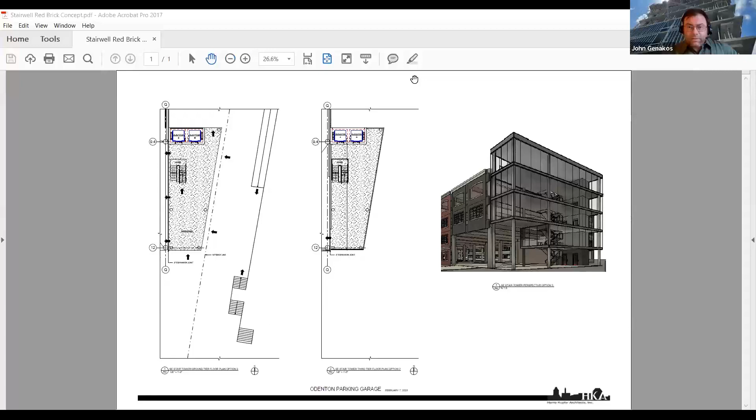For context, the platform is right in this area here, with the station south of here. This is one of the main off-ramps from the platform and stairways. This is the southeast corner of the garage. I'm not sure if you can see this, so I'll blow it up a bit more to make it easier for everyone.

This is really the main circulating corridor where most passengers will be exiting off the ramp and stairs and entering into the garage. Hopefully you can see my cursor moving around, can everyone see that? The idea is to make the entranceway as open and accessible as possible, including the bottom section, so folks exiting the ramp or stairwells can go right into the garage, circulate up the stairs to the second, third, and fourth levels, or go right into the elevators.

The other concern was making sure this area was open enough in case of an emergency evacuation at the platform, so everyone from the train could exit and, say on a rainy day, get into the garage in pretty short order. Informing that corner was really important, especially to the state and county partners from a safety and circulation perspective.

You can see we've grabbed a representative concept here of how the brick would look from that perspective on this side. That's part of the schematic approach we've run into and walked through.

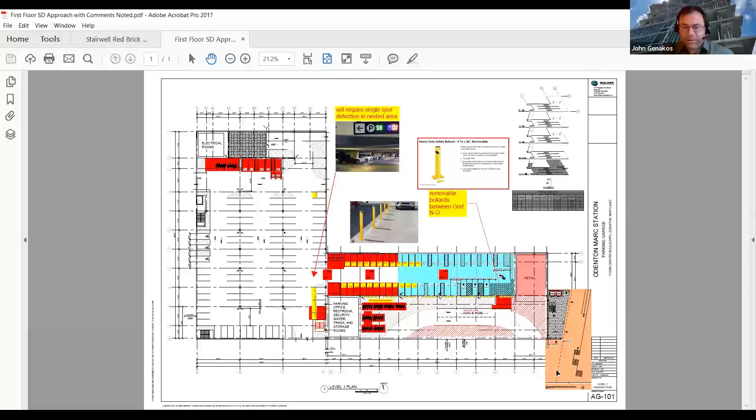Now you'll notice, and I'll focus in on this, that we've made a couple changes. I'm going to start in the southeast corner and work my way fairly quickly through some of the major tweaks or comments we've incorporated here. You'll see we still have retail included in our concept and approach. Some changes we've made from a circulation perspective are mostly driven by safety and convenience concerns.

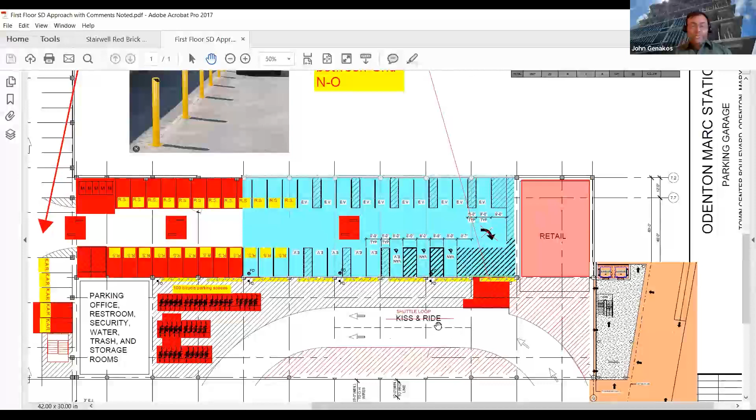Before, we did show traffic flowing through this first floor into the kiss and ride area - we've now eliminated that kiss and ride spot and turned this into a shuttle loop. This enables us to park at least 2 buses in this area with queuing available. The reason is discussions on the county side about future-proofing the garage in case more resilient and robust bus service ends up happening at the garage, so we have the infrastructure in place, as well as enabling space sufficient for a bus to queue and one to drive past it.

From that perspective, we close off this circulation area, which was open before, with some removable bollards, so that in an emergency case or other operational needs we can open this up - you see the bollards marked here. We added some additional bollards across the face of this parking area just to protect pedestrians from this flow. So again, if you're coming off the platform, you can come down the ramp, off the stairs, no walls through here.

You can walk unencumbered into the garage on the first floor here and continue walking through. We have a pretty substantial number of bicycle parking spots here, and you'll see another cluster of these in the northwest corner of the garage too. We felt this will also enable, with the connector trail coming in from over here, for bike passengers to bike into this covered space, park their bicycles, and then be able to go to the train.

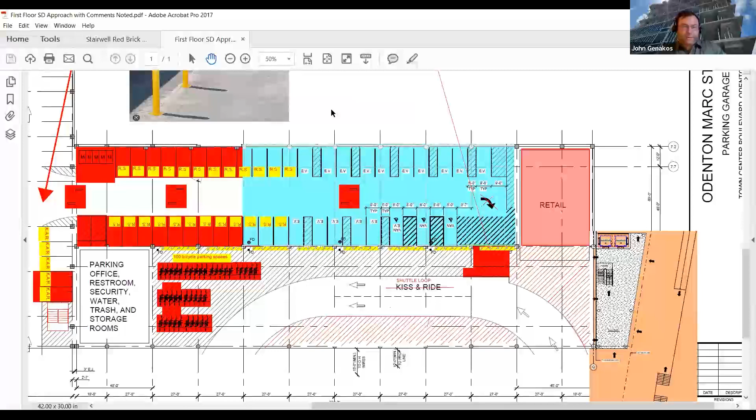I'm going to back out of this for a moment to give a larger context. You see we have our ADA compliant van parking spots here, and an electric vehicle cluster in this area as well. The idea is we would augment this, now that we've turned this into what we'll call a dead end, a spot where you can come to the end, make a K-turn, and drive back out. We want to make sure customers are aware of that, so we've suggested having a cluster of signs before you drive down this way to indicate where the EV parking is, where the ADA parking is, and the number of available parking spots.

Other notable first floor suggestions we've backfilled in: here again in the northwest corner, this is the line of the garage. We've added another cluster of bicycles here, and then another smaller cluster of EV parking close to the electrical demarc rooms.

Those are really the major tweaks to the schematic approach. Again, trying to ensure we have good circulation into the garage, good clusters of our EV and other amenity related spaces, and more so the major concern being ensuring a good, clean, unencumbered and safe access into the garage.

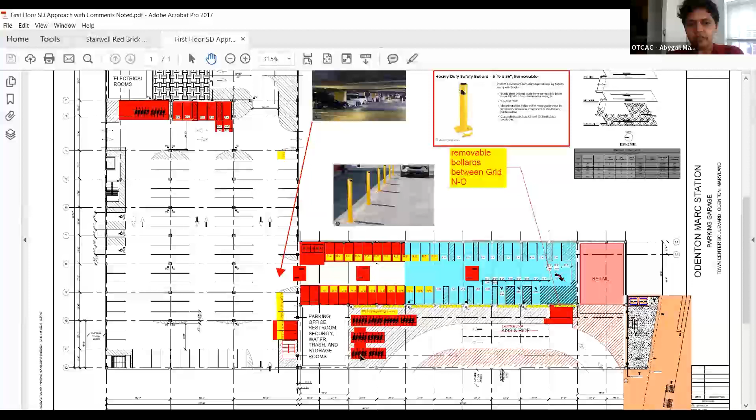And I know we brought this up previously, clarifying the bicycles and the sidewalk length, will they be separated somehow, or will bicyclists and pedestrians just have to share the typical sidewalk length?

If there aren't any other questions on the first floor schematic approach, that's actually a great segue into a work in progress we have for the Town Center Boulevard cross section that I could jump to. Okay.

Any other questions on this? What does RS stand for? By the EV spaces, it says RS in the red areas.

Is it these ones here? Oh, reserved space. Okay. So there's a small pocket of reserved spaces here that's adjacent to the parking office. It's a small cluster there.

Okay, and KAR? Kiss and ride? Yeah, those are the kiss and ride spots there. Okay, just making sure we understand the nomenclature.

Thank you, no problem. Sorry, that writing is so small that I can barely see it with my glasses. It must be time for an upgrade.

If there are any other questions, I'll go ahead and jump to the Town Center Boulevard cross section. I know this was of interest. Now, I do want to say that this is still a work in progress, so we are doing this in consultation with our traffic study engineers as well. My understanding is this is being informed by the current master plan overlays that we have for the area.

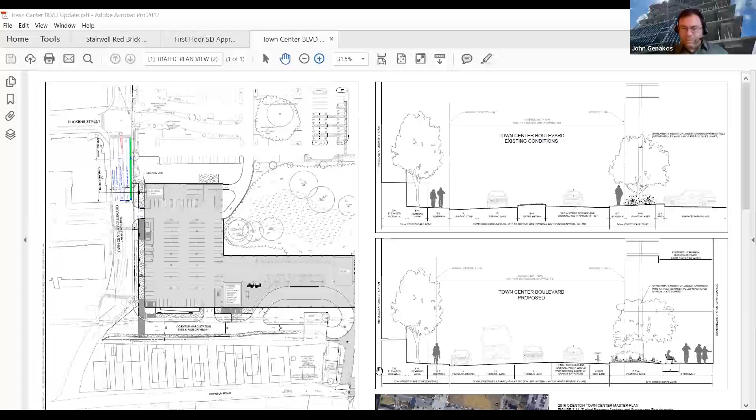This is probably really small, so I'm going to focus in a little bit so we can see it better. Bear with me for one second. I'm going to scroll up a little bit so we can see. Hopefully this will behave itself and we'll be able to see a little bit.

Just bear in mind the top image is kind of what the existing conditions are, and I should be able to at least give you an idea of what some of the proposed approaches are.

You see here that we are eliminating it. So we'll start from, I guess, my plan left over. You're going to see that there's similarities for our first few zones on the far left hand side, and then we started making some tweaks or changes as we get across Town Center Boulevard closer to the garage side. This is the side where the garage would be located, just to orient everyone.

So we're proposing removing the grass median in this space and creating a turning lane so that we'd be able to turn into the garage from there. We have another smaller lane that we are then using some of that space to create a bike lane. We'll have a planting area, seating area, and then a sidewalk area, then the garage from that perspective.

This is the approach that we are currently studying at this point in time. My understanding is the bike lane and planting areas keep the bike path and pedestrians separated from one another with this kind of planted space or buffer area. Now, obviously, we're not showing any protection or other versions of maintaining protection for the bikes in this image, but there is obviously an opportunity for fencing, signage, and other improvements to ensure there is at least a visual demarcation along with the marking of the road for the bike pathway.

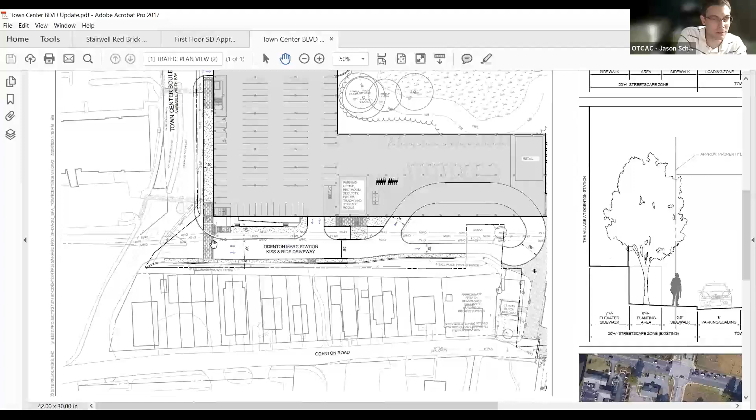And Jason, you're referring to it connecting, I'm recalling, on the other side. So if you go to the other side, north of your parking deck. Okay, the side of Annapolis Road. Oh yeah, across the road, across 175. I don't even think this was looked at.

Okay, yeah, I see what you're doing here. You're basically taking that sidewalk and right-angling it into the existing sidewalk so it'll carry upwards.

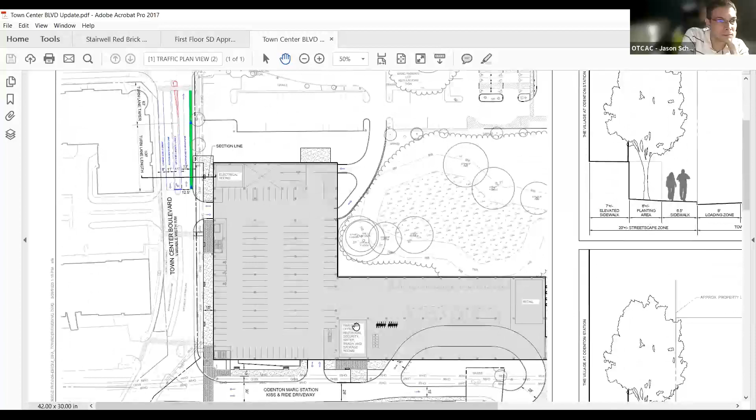Mm-hmm. Okay, yes. And so this would be setting the context, imagine if you will, that from here north is the domain of the TOD developer. Yep. And so this cross section will basically set the precedent for them to carry forward with the rest of their streetscape.

Now I guess the question is, why aren't we doing that? And the answer to that is, by doing so, we want to allow flexibility for that developer as far as where they might want to have additional curb cuts.

They might want to move this entranceway, they might want to move it further north, and they'll probably need to tie into utilities and other areas here. So it kind of doesn't make sense to make one long, beautiful continuous streetscape to 175 that we know is going to get destroyed as part of the developer's initiatives and efforts from there.

So where does your scope of work stop? Hello, Gordon. Sorry, Stuart, we have not had a chance to delineate that quite yet.

Yeah, because I think that's somewhat of a concern. And I understand not wanting to do something that might get destroyed. Totally agree with that. But I think at some point I'd really like to know where that goes. I mean, if your traffic line and lane changes are where they're indicated, at least it should go to the corner.

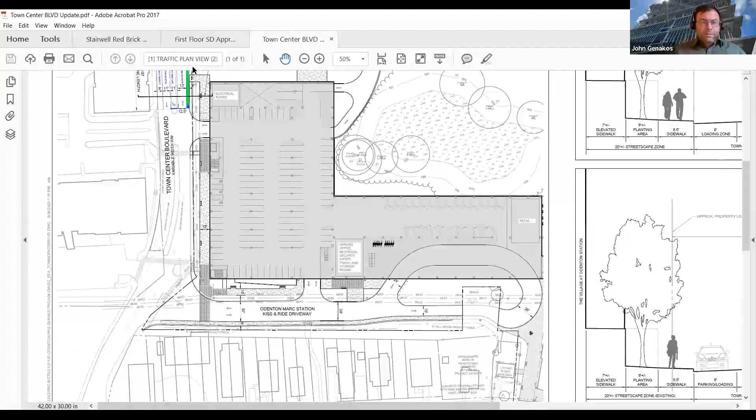Anyway, I guess one of the factors here, and it's kind of outlined a little bit in the hashed line, is there are BG&E, or electrical poles, that run the entirety of the Town Center Boulevard area, I mean, high wire poles or medium voltage distribution that runs down the street here. And I think part of the issue we're running into is we also need to maintain a 15-foot right of way on either side of that pole.

That's a very good reason. And look, to my credit, shame on me, but that's the difference between two-dimensional, showing this on a plan, and three-dimensional, knowing and being on the site, and how you really can't modify it because of the site condition. You really can't, in trying to achieve and accomplish the same thing. So got it, understand, remember that.

Yeah, we looked at what the cost would be to try to move those underground or move them altogether, and it's pretty prohibitive. Got it, got it, I did it across the street. You don't have to tell me. Understood.

This is kind of a marquee development in a very high profile area. Wouldn't that be a good reason to spend the money to bury those wires?

They're buried already, I think it's just moving them. Yeah, they're underground. They're not high voltage lines above. They're the streetlights, aren't they? No, they're poled electrical, so they're above ground on poles.

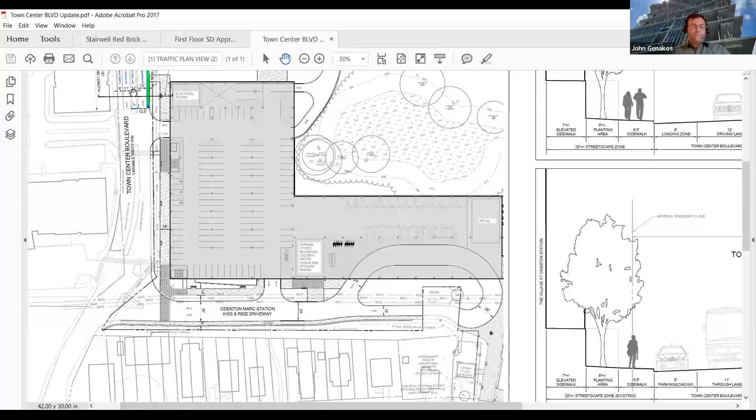Right now we're showing a bicycle lane along Town Center Boulevard. What if we were to direct bicycle traffic out to the pedestrian bike lane or bike pathway up this way? So it would travel up under the bridge, under 175, and out of the site that way. Then if you're coming into the site, you could come into the station area here and travel into the neighborhood rather than mingling it with Town Center Boulevard.

I think anybody's going to go wherever they want no matter what we do, or no matter what you do, or if you put a bike lane there or not. The bike police aren't there. If they want to ride on the sidewalk and that's convenient, I think that's what's going to happen. And in reality, I just... but I do think it is.

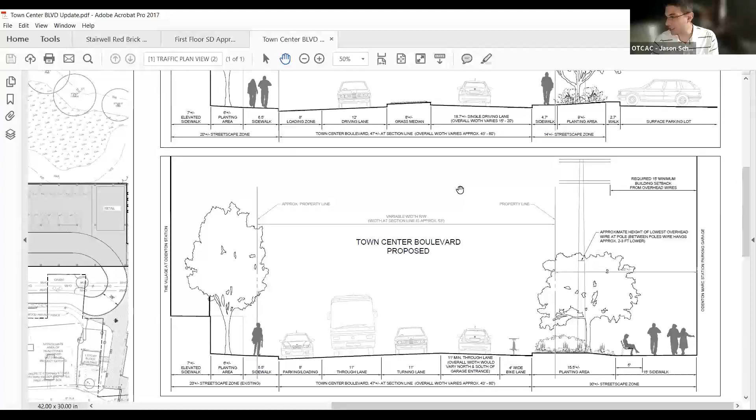I had a few other items just to touch on really quickly, but I don't necessarily have to.

We have kind of an informed temporary parking approach that we've collected, which the public partners have agreed upon, as far as how we're going to approach parking while the garage is being built, where to locate ADA parking spaces and other accessibility spaces, which will connect via a ramp to the pedestrian bike pathway that gets folks to the south platform and access to the platform itself.

So we've informed that space. I'm not sure if you want me to touch on that now, or I can touch on it later when I show the overall site approach. I just know we are making that connection and making improvements to the parking spaces north of the wetland buffer area, north of where the garage would go, with the intent that being the space where ADA and kiss and ride could go. So you could still have drop off, and a clear and compliant pathway to the platform to service customers while we are interrupting that flow through construction.

Okay, would it be possible for you to come back next month with a specific focus on those two items?

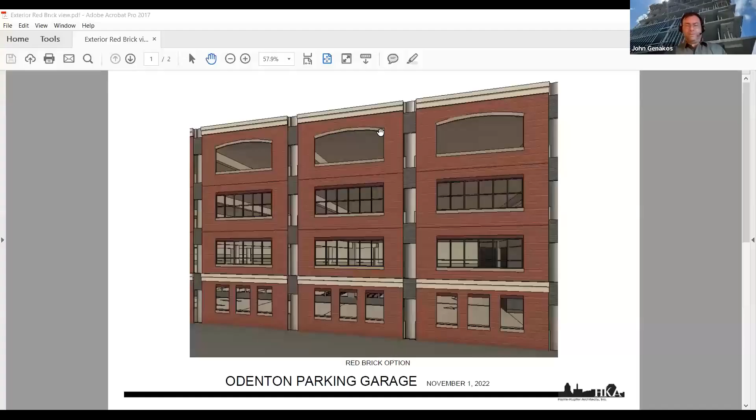And I do have some examples of that. For those of you who were here last time I presented, I can show it really quickly - I wouldn't call it a high resolution model or rendering, which we do have, but let me share it. I believe last time there was some discussion about it, but this is just a panel cross section here, and this is the southwest corner, as if you were across Town Center Boulevard looking northeast.

Yeah, I think we had presented a number of options - I think maybe it was Abigail, I'm not sure who. But there were a bunch of other considerations, because this looks like a warehouse, a canning district in San Francisco or something. I don't know that this would fit the vision for Odenton. I don't know why this was picked. Why was this selected? What does this do? It's just red brick - it's a parking garage, end of story. But it doesn't matter if it's a parking garage, it's a building, a huge one.

I mean, I think what we talked about - I recall the red brick, I recall the tan brick or gray brick to distinguish the openings for the entrances to the garages. That's sort of what I remember. This corner here is just a stairwell. The opening that you spoke of, or showed from the other perspective, is in the corner here - that would be in the southeast corner.

And Martin, I don't 100% disagree with you, I don't. But I think we'll have that time now, later on. This is so far from our last time coming back, with input and community meetings and all that.

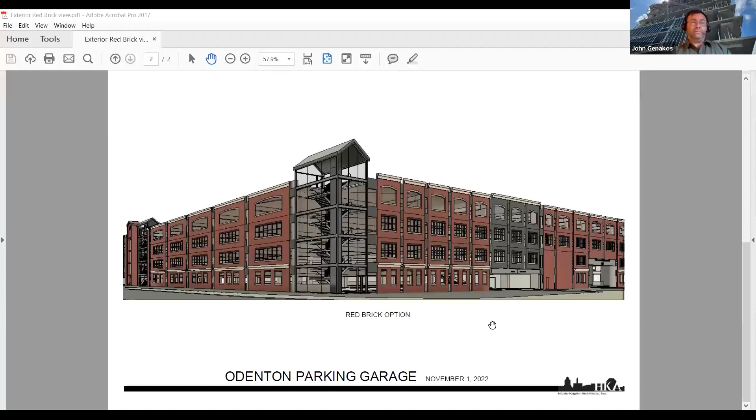Okay, thanks, John. So I want to give each committee member a time to make a final comment. Andrew, any final comments for John?

I just wanted to say that I like the glass corner on the southeast corner of the building. I think it has the potential to create something interesting and dynamic from the train station side. That glass canvas could be a good opportunity to create an interesting visual graphic design on the glass, through fritted glass or some other kind of glazing coverage, or even using vertical fins to add some color and depth to that facade. That would be interesting to look at while riding by.

Thanks, Andrew. I was curious, what phase of design is this project in right now? Design development. Yeah, this is the time to be changing the look of the building. Just tacking on to Martin's comment. Thanks, Andrew. All right, Colette.

I really appreciate the green space, how that's been done so far, just on that one rendering, and the pedestrian sidewalk and the bike path. I really appreciate that those things are being brought in. I'm excited to see how this continues to progress.

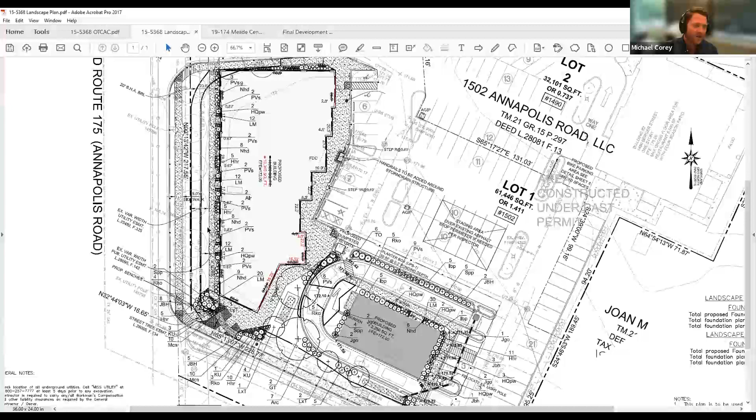The buffers on the site are being held and are following approved modification number 13.314, which reduced some of the buffers around the site because of site constraints, mostly utility easements along Annapolis Road and some overhead power lines along Berger.

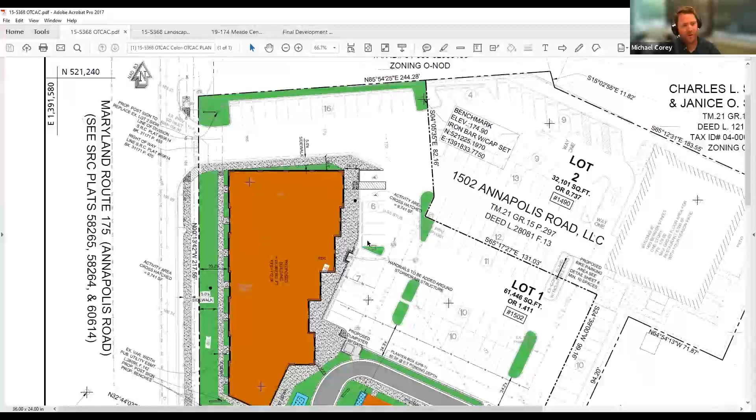For the activity space and green areas on the site, let's go back to the color exhibit because it shows it a lot better. Activity spaces would be considered the sidewalks along the parking areas, which are expanded for more pedestrian flow, and the larger entryway plaza area in this corner of Berger and Annapolis Road with benches and a more architectural staircase leading up. The green areas, as you can see, are along the frontage, perimeter, and interior landscape islands for landscaping.

Setbacks for the larger retail building are 35 feet off Annapolis Road, driven by a 12-inch water line with an easement along the frontage, so we are probably 3 or 4 feet beyond that.

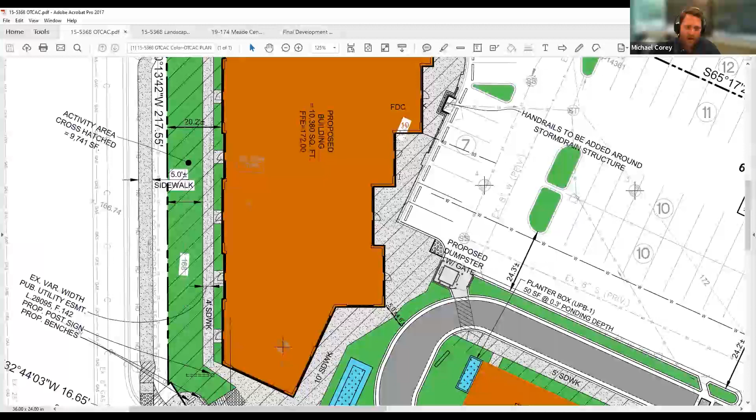Bicycle and pedestrian amenities. I mentioned the benches before—we've talked about adding a couple more benches along the doorways, outside the retail areas, and adding proposed bike parking in the interior of the site that would provide bicycle parking for both lot 1 and existing lot 2.

And then signage and lighting. Signage would be along the frontage on Annapolis Road. They would have to be either wall signs or pole-mounted hanging signs because of the utility easement, and we didn't want to disturb that or risk the signs having to be removed in case of a utility replacement.

Site lighting is mostly existing along Maryland 175 and Berger. There are cobra lights, and the interior lighting are traditional style lights. As you can see, these are the different fixtures, and this is the site as of a few years ago—it's pretty similar today.

So, Michael, while you're moving on to the next one—is the footprint size the same in this revision that you had? No, it is a reduced footprint. So the previous layout, as you can see, is this.

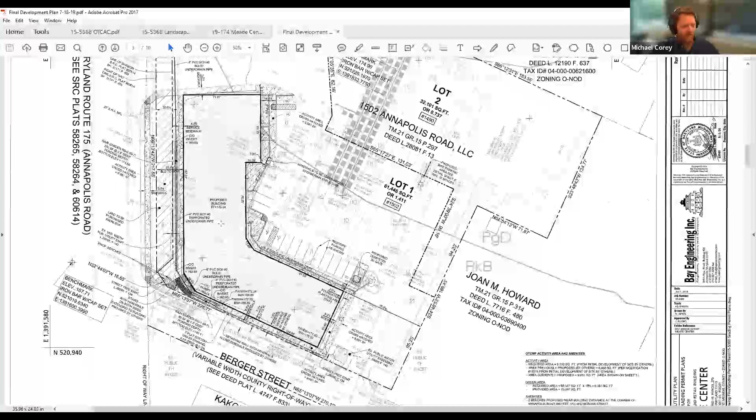Okay, so it's this entire building, and with the new layout, you can see there's a lot more green space in between, and a little bit more up front.

Michael, this is Martin again—another question about the drive-up portion for this restaurant. Did you select it just out of curiosity because there's no room for parking, or is it the kind of restaurant you're expecting to put there?

Jim might have a better explanation, but we've removed the office portion of this project because it was previously approved prior to COVID, and since then that need has really been removed, as we all kind of know. So based on that, it could have just been all the same style of retail, or adding this restaurant drive-through gives the site a little bit more flexibility. Jim, I don't know if you want to expand on that further.

Yeah, hi everyone, this is Jim O'Hare, I'm the developer. Just so everyone is familiar with the site, we've actually built the entire parking lot, and this is where the All American Steakhouse is located. They're a tenant of ours and have been open for maybe 6 or 7 years now. But the change away from office was really, as Michael pointed out, demand initiated, and that eased our parking burden.

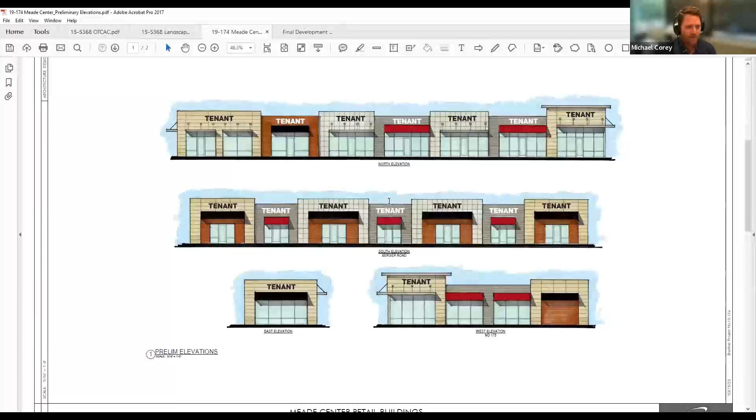Multicolored, to spell out the different tenants easily. And the drive-through, the same color. I believe these are pretty close to the steakhouse colors.

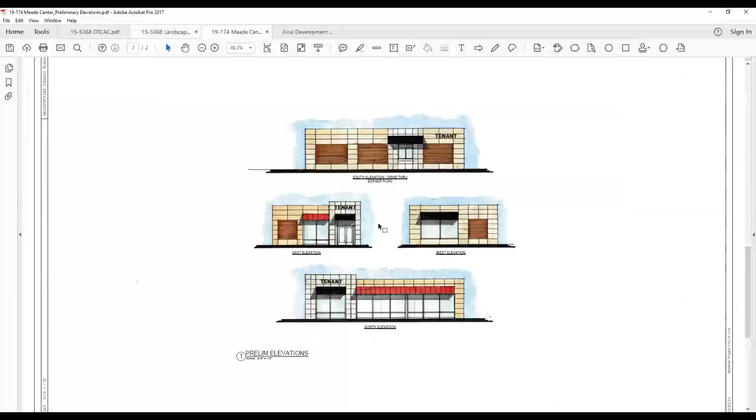I'll bring up the landscape plan one more time. Where's the steakhouse, Michael, again? So the steakhouse is back in this back corner.

So the steakhouse would be covered partially by the new retail on this front pad. Well, the steakhouse is not especially visible though currently from the street, so they are anxious to have the rest of the development built.

So Jim, I'm not familiar very much with this area. What is there now? Is it just a vacant lot with trees? No, if you look at the site plan, on lot 2 on the far right, that building is constructed. It's a 6,000 square foot All-American Steakhouse, a local Baltimore-based chain. They have maybe 8 or 9 restaurants around Baltimore and DC, and they've been open and operating for 6 years.

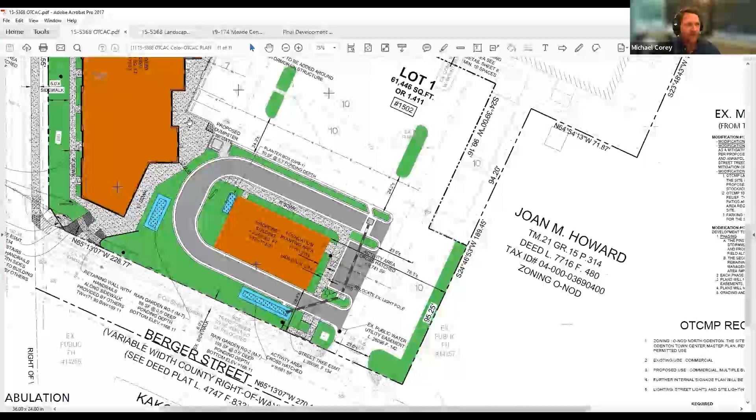There is proposed sidewalk along Annapolis Road, and then there's going to be an ADA ramp in this back area to flow through the site and give another access option to the front of retail.

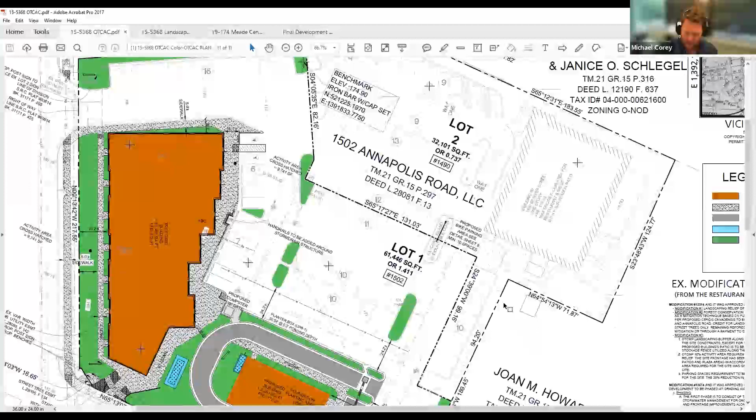And the final things. At this time, we're not proposing any bonus program requests. Other than a modification to combine preliminary and site development plan through Anne Arundel County, we are not proposing any additional modifications other than the ones that have already been requested and approved for this site.

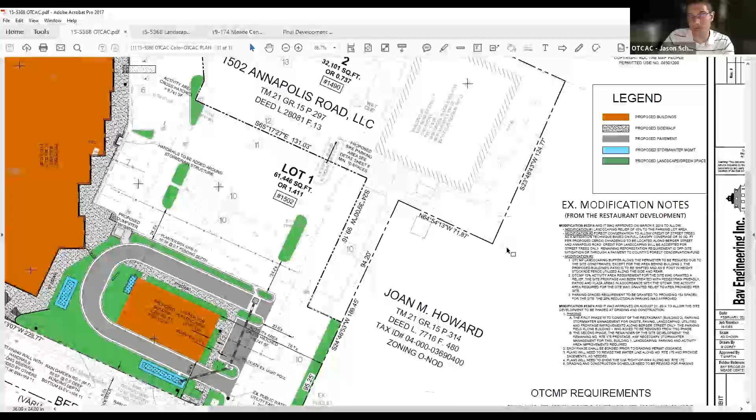Okay, so just to clarify for the committee, there were a number of modifications you previously sought with the previous design. You received approval for those, and those modifications still apply to your current proposal. You are not coming back to revisit any of those modifications or request any new modifications with this revisit to the committee. Did I hear that correctly? Yes. Okay, I just wanted to make sure that was clear for the committee. Thank you.

And with that, I think we've covered all of the bases. So if you have any questions for Jim or I. Okay, so as always with the OTCAC process, the committee will get a chance to ask questions first, and then we'll bounce over to the public, where members of the public can ask questions as well. So I will start off to see if any committee members have questions.

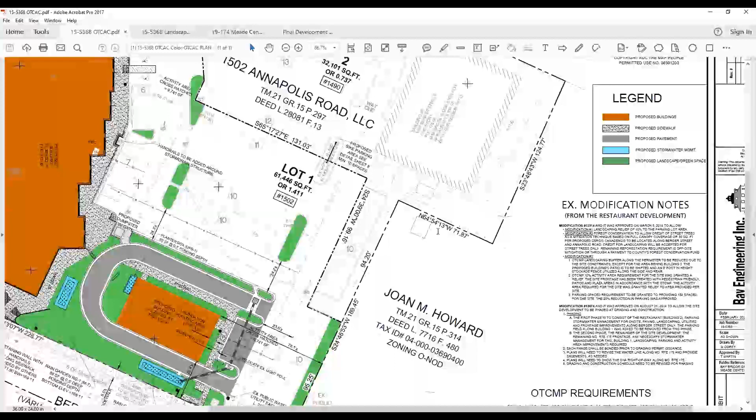Not as much a question as a minor comment. I've seen this before in other places, that drive-through going around the building the way it is can make it challenging for pedestrians coming from lot 1 into the building, where you have to cross over the drive-through or walk around to the front. People in the drive-through are probably paying more attention to where they are in the queue and less attention to pedestrians. So it's a little tricky, but I don't think there's much to be done for it. I think that's a good comment. We will work on a plan to make sure there's a safe crosswalk from the parking lot to the front entrance.

This is Stuart. Don, I agree with your comment there. The one thing that helps though is even though it's separating the 2 lots, it's really one parking field, so people are going to be going out the other entrance and heading west more than likely. I think it'll be okay, but it is something that needs to be addressed, at least for signage. Only other thing I can mention, if that's the way it is, that's great, no problem - the 5-foot sidewalk in front of the building.

So there is a sidewalk between the retail that would be accessible, but I could see people just walking across the grass right to your little sidewalk there into the individual spaces. That's just human nature. It's only a 5-foot sidewalk where we have much larger sidewalks elsewhere. I know this isn't in the town center, it's outside the core, and 5-foot is the standard, I understand that, but understanding that's probably what's going to happen, you're going to develop grass traffic patterns. Maybe address the opportunity for people to cut from that main sidewalk directly to the storefronts rather than going all the way to the corner and back in.

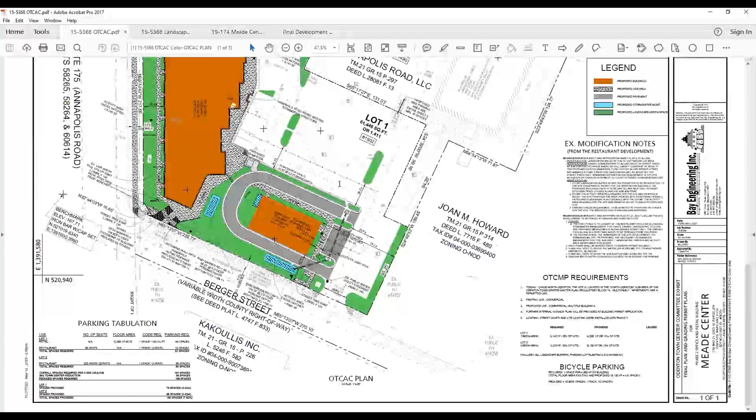With regard to energy efficiency and use of energy, have you considered solar somewhere on these buildings? Yes, I put solar on many of my projects whenever I can make it work economically. The issue that arises is if you have ownership of a strip center like this with tenants, and you put solar panels on, it's hard to link those solar panels into the tenants' meter, and they don't want to pay for it.

What about the restaurant? That's a possibility depending on who that is. One thing I've done is a smaller amount of solar tied to the common area meter. But even then, we have super high efficient LED lights, so we just don't use that much electricity. But we will put in solar wherever we can.

The other thing we've done is when we built the parking lot, we installed a Bay Saver stormwater management system that we clean out regularly. It just got its 5-year certification, so it filters all the water as it runs off the parking lot.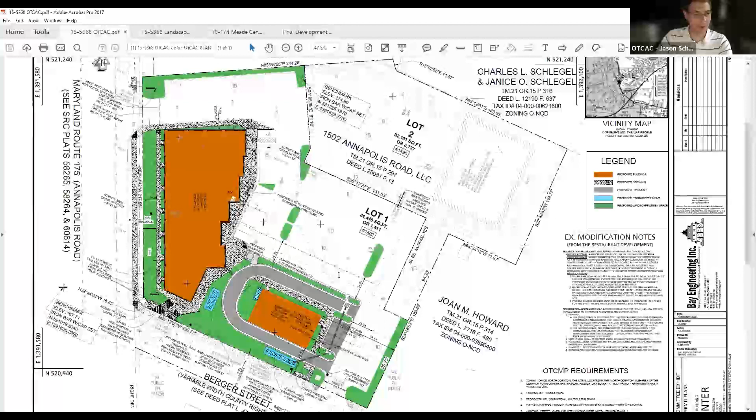Number one, can you indicate what direction the drive-through is proposed to be? Is it clockwise or counterclockwise? It is counterclockwise, yes.

And the entrance from Berger Street is still proposed to be two-way, correct? Yes.

Do you believe you're going to have any queuing issue with your drive-through loop being full, and because you're so close to the entrance with Berger Street, people end up blocking the entrance so they can't get into the Lot 1 parking lot because of queuing?

So we've done preliminary analysis looking at vehicle turning in and out of the drive-through, and queuing within the site and what would happen if queuing came out onto Berger Street. We can get almost 12 cars from pickup to approaching out into the parking lot. It would take 24 cars to go from the pickup window out to Berger Street to become an issue where it would back up into Annapolis Road, and that's just if they come from the Berger Street entrance only.

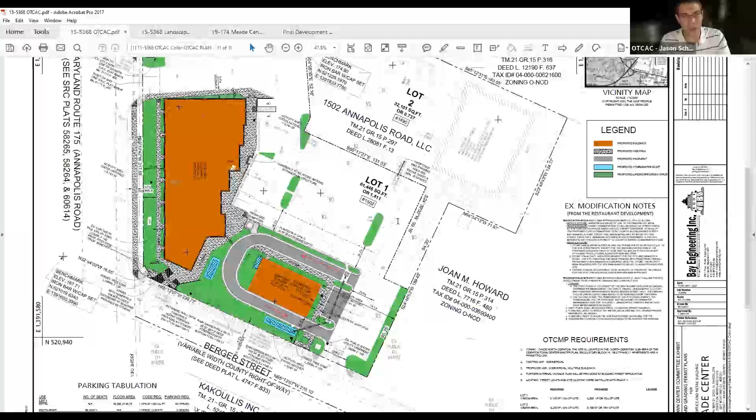Number two, I'm a little iffy on where you said your ADA access is going to be. If someone is in a motorized wheelchair riding in from Annapolis Road, would they have to go all the way to the corner of that intersection with Berger to ride in and get to your retail, or go to the other end of the retail and come back around? It's a little unclear how you're planning for ADA access. I love the idea of that staircase, but I don't want you to disadvantage ADA residents and force them to travel longer to reach your retail space if possible.

So, I fully acknowledge that this is also an edge case, but it's worth considering. This front plaza area is a carryover from the previous design. We can look at adding a switchback ramp here. I just know there is quite a slope from Annapolis Road up to the existing pad.

And because the parking lot's existing, we can't really play with those pad elevations too much. But we can look at adding an additional ramp, or I guess we don't really want to remove that ramp down there, because then we're kind of moving the access from one spot to another instead of making it more accessible. But we'll definitely look at that and see if it's a possibility.

Can I suggest, I don't know that a ramp down there would be worth giving up the green space, given that we are on 175. If there was somebody, even pedestrians or someone on a wheelchair, I just don't know where they would be coming from. So I think our focus should remain on people arriving by vehicular traffic and then having access into the retail, into the restaurant.

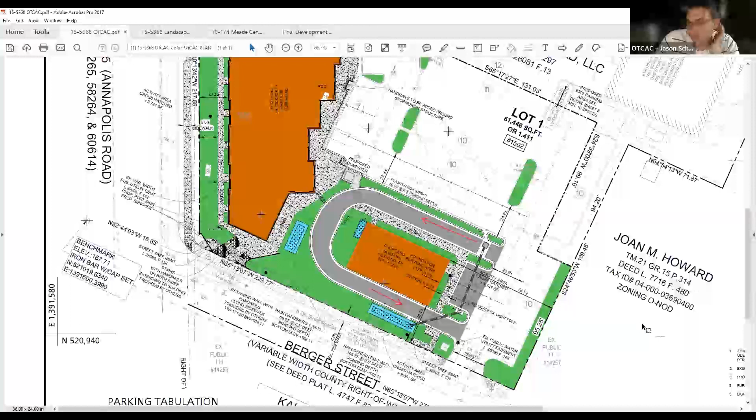Absolutely, absolutely fair. And the one other thing I would also say is the one place where people possibly could come pedestrian traffic would be up Berger Street. There is some residential up that way.

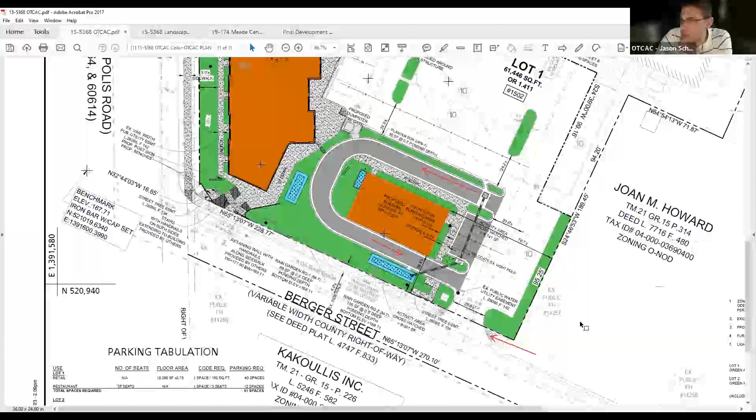That is true. Yes, there are residences back on Berger, but it looks like you have stairs. I'm looking on the north side, and it looks like you have stairs to access your retail on the north side as well. Is that correct?

I believe the stairs are only right here. Yeah, that would be more like a service type door there. We don't expect that. We expect that the store frontage would be facing inward.

Okay, all right. So yeah, that's fine then, because if that was going to be an actual entrance to the store, and the other side was not, okay, I'm good there then.

And then the last question I had was in terms of, and this may be a moot point because the parking lot is already developed, is there the ability in the future to add EV charging stations in your lot design, or has that time already passed since the lot is already there and you're not planning on modifying it?

No, we absolutely plan to add EV chargers. That is the future, and we've identified locations. Michael, do you want to show back towards the steakhouse where those locations would be? Yeah, because the steakhouse would probably be the one where cars would sit for an extended period of time to actually use the chargers.

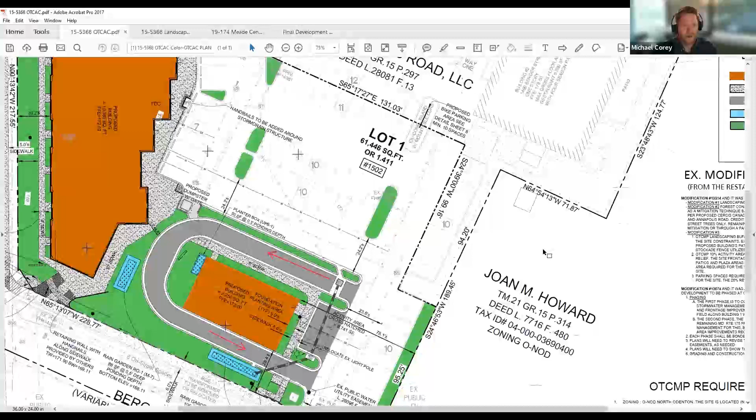So there's a possibility to put them along this kind of edge. There's existing electrical transformers, so there's space to put a bit more of the necessary infrastructure for the chargers there. There's also some space along this rear. So we've identified some spots we need to address when we're in the site design, when we're talking to charging infrastructure people, to figure out where they can get their feed from and what also makes sense in their eyes.

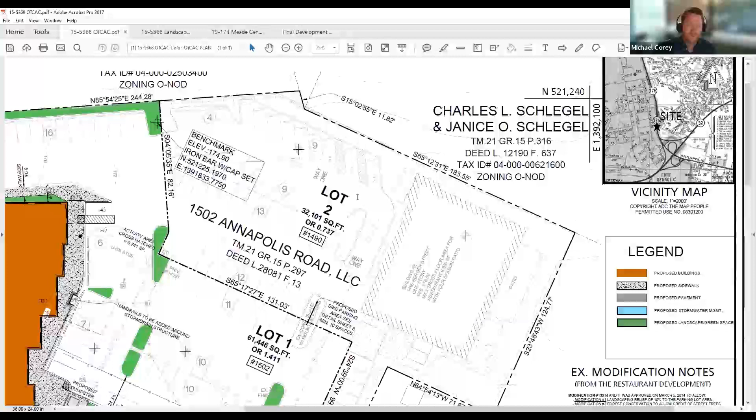No, that's great. I appreciate that. It's not precluded, it's still a possibility for the future, which is great.

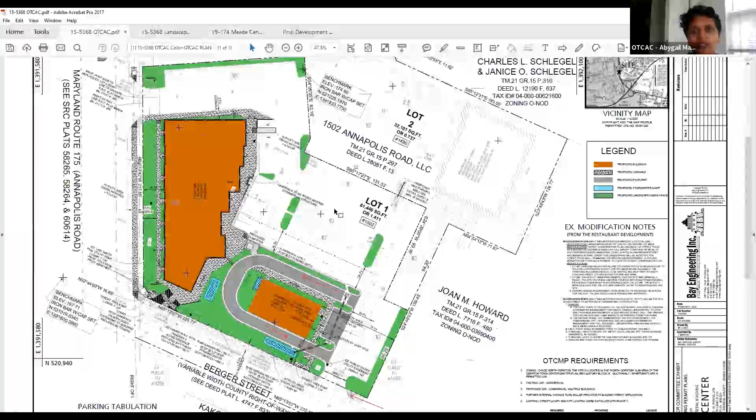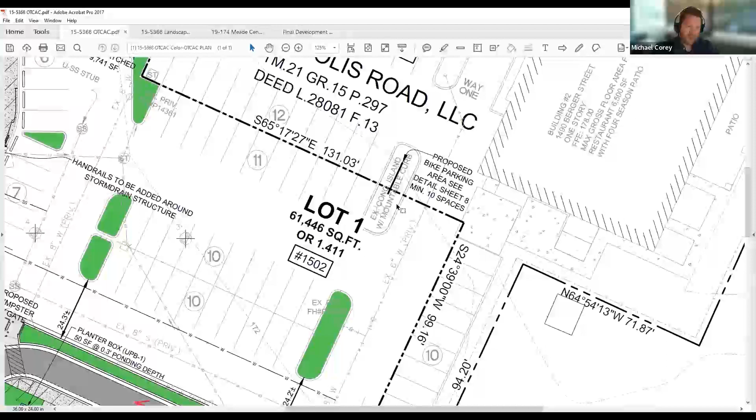So right now we have the bike racks kind of centralized. This island exists as kind of a mountable curb, not a landscaped island. But we can look at possibly adding something to the front. This is not going to remain a 10-foot sidewalk, there's probably going to be more planters and foundation landscaping. But this stormwater feature is not set there, it can be shifted slightly, and everything could be made to flow a little better.

I just didn't know if there was one at all, so the fact that there's one there sounds good to me. It didn't need to be in the sidewalk area. Okay, gotcha.

Thanks, Abygail. One other comment, just a consideration, something to think about: you have a fair amount of green corner space there with the staircase. Consider if you have room for some type of art exhibit as well, like a sculpture, to highlight that corner, in case something comes into play. Just an idea, Jason. Great, yeah, that is a good idea. I agree.

Okay, any other final comments from the committee? Andrew? The elevation that faces 175 Annapolis Road, you mentioned that that's really kind of the back end of the retail center and more of service entrances.

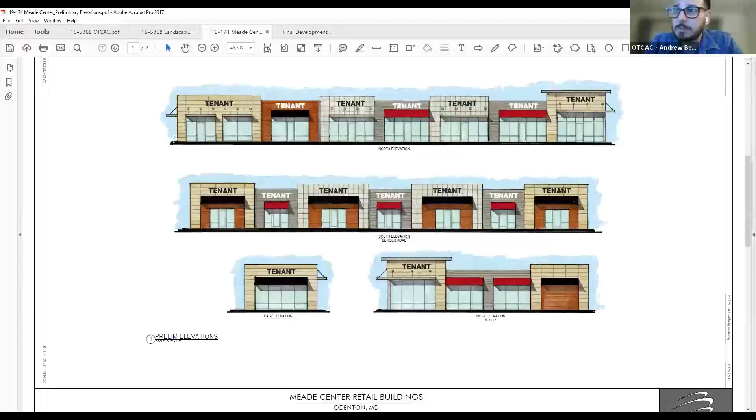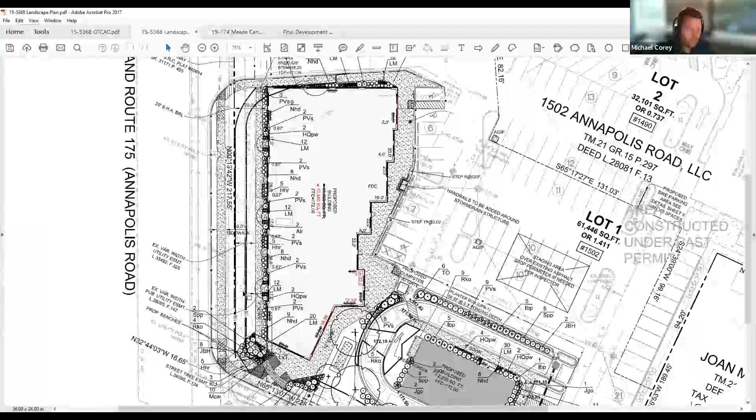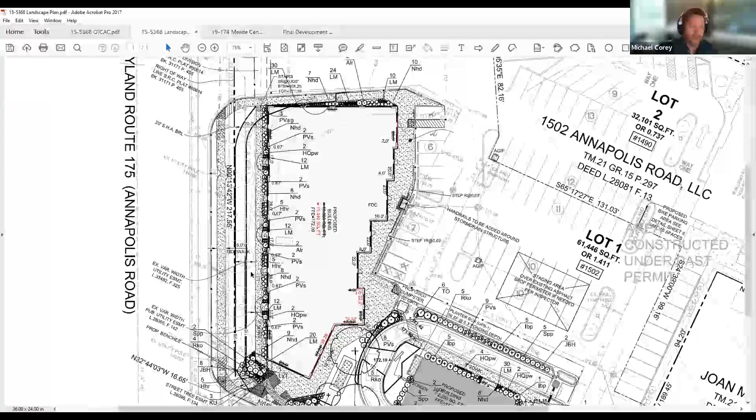And can you describe some of the landscaping that you have along 175? I believe we were proposing street trees, and then landscaping in the foundation plantings. But because of the storm drain and water line, there are a couple of utility easements in there, and investing a lot into landscaping into something that could be torn up didn't make sense. So I think with this, just the street trees and the upper foundation plantings would give a good look, with grass area in between on that slope.

Okay, I agree. I think landscaping back here is going to be super important. And I know there's definitely a challenge trying to balance this being back of house and also something that's street facing. So I think you're achieving the right balance here, and I applaud that.

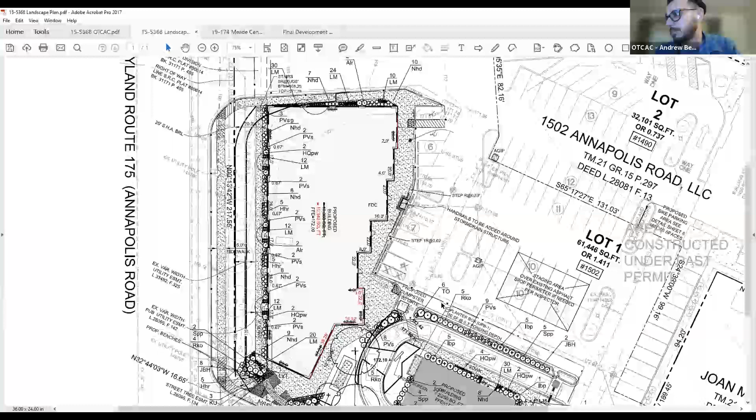Okay, so thanks everybody for the good discussion and comments. The question before the committee is, they're here for a request from the committee to submit a letter to the county with our assessment of their redesign, in terms of whether we feel it meets the intent and scope of the master plan.

Overall, the comments I've recorded from the committee are, I would say, positive in terms of the presentation, as well as from the community members. Jim, they're giving you a lot of credit for your statements on being so positive with considering environmental concerns, doing the best you can to minimize environmental impact by looking at the heat island, as well as the electric vehicle stations and permeable surfaces. So positive feedback for you on that from both committee and community. Thank you for that.

So I would open it to the committee for a motion on what the letter should say in terms of direction. I make a motion that we approve the plan as presented with the comments you just suggested, including in the letter, as well as the solar panel, to encourage that also.

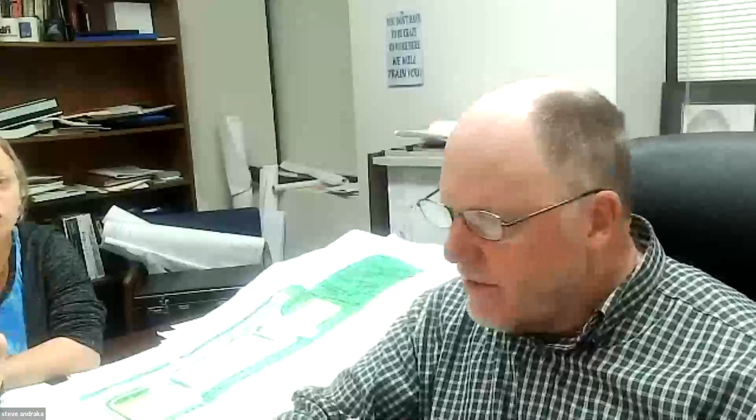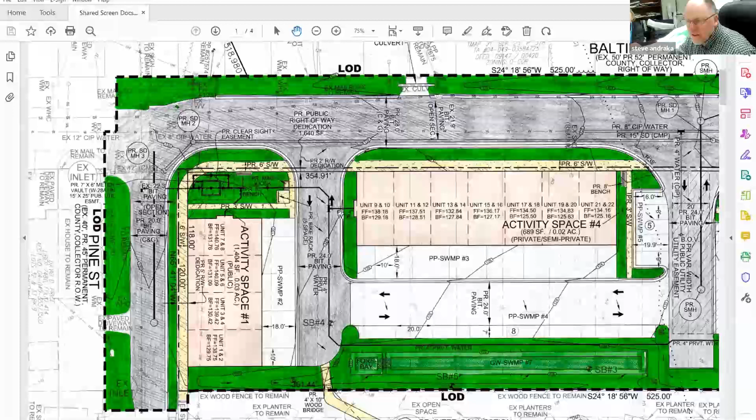Well, this is a proposed residential development. If I go ahead and share the screen here it might make it easier. Did I do something wrong? Oh, it's over here. Can you all see that okay? Yep, we can see your screen. All right, great.

Existing on the site, the existing use was an old daycare center. That building will be demolished. The site is within the Odenton core district zone, and the proposed use would be 28 over-under type condo units.

The layout would have all the units facing outward, so the front of the units would face the roadways, and the parking would be internal to this parking court. We'd be providing one car space for each unit, plus an additional designated space for each unit, plus another 13 additional spaces for guest parking and whatnot.

We'll be short essentially by 15 spaces based on the county code requirements. But along Baltimore Avenue we're doing 28 foot of pavement, which would allow for on-street parking on one side of the road, allowing for an additional 11 spaces. Pine Street would not have any on-street parking because it's a narrower road type section.

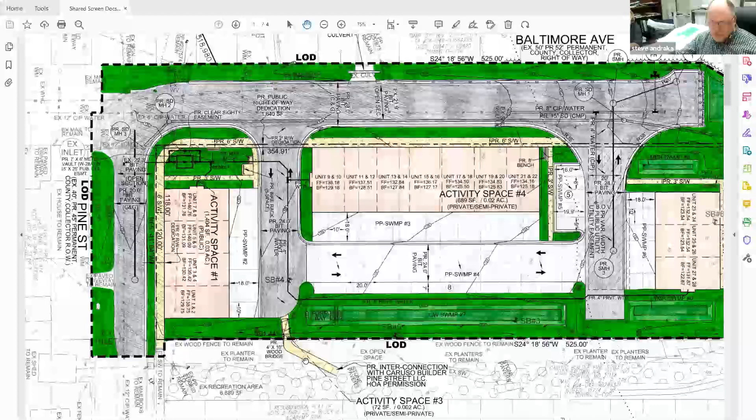Landscaping wise, we'd be providing street trees along the roadway along Pine here, and we're going to be providing shade trees between this proposed development and the adjacent development, along with internal landscaping. In terms of the pavement, it's trying to help address stormwater management and soften things a little bit.

We have the main drive aisle coming in, and where your utilities are would be your regular type pavement, but we're going to use pervious pavement like pavers or some other choice for the internal area where you don't have utilities, and all of the parking spaces would also be pervious pavement. Additionally, for stormwater management, you have gravel wetlands and micro-bioretention areas.

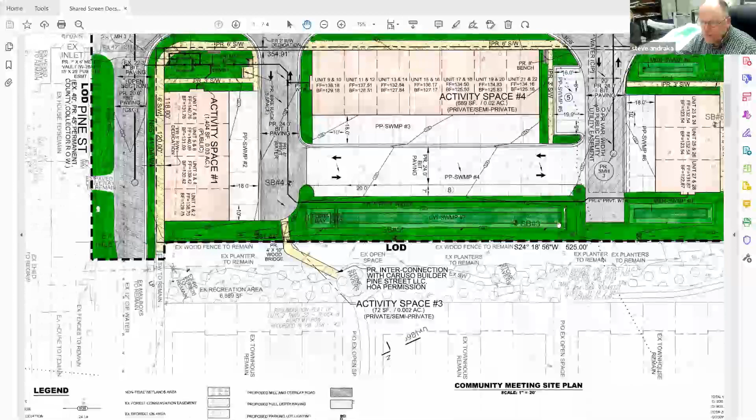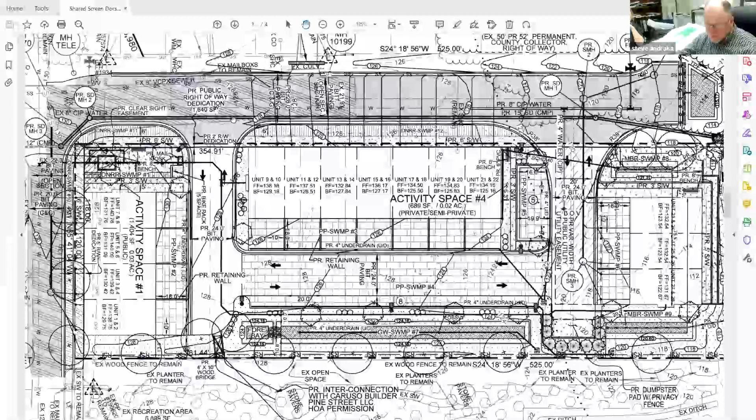Lighting - it might be easier to jump back to the landscape plan. We've got parking lighting, let me zoom in a little bit on this. So we've got lighting within the parking areas to help illuminate those, and lighting along the existing signing along the road at the intersection designating between Pine Street and Baltimore Avenue, along with existing street lights.

Again, the lot configuration, like I indicated, these would be fronting on the roads, and these last units are fronting toward the wetlands.

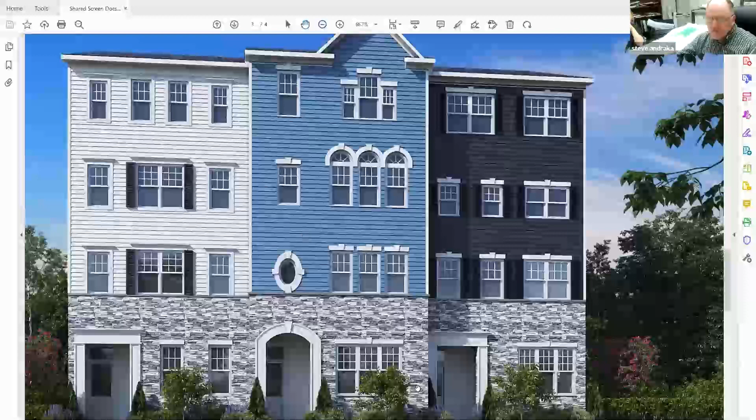Jump down to the architectural. Architectural rendering, there wouldn't be any steps up on the exterior, it'd be level with the sidewalks. And then it's a 4-story type unit, over under type condo townhome. Same type of thing on both streets.

The site's not within the historic preservation area. And then we're not going to be seeking the bonus program.

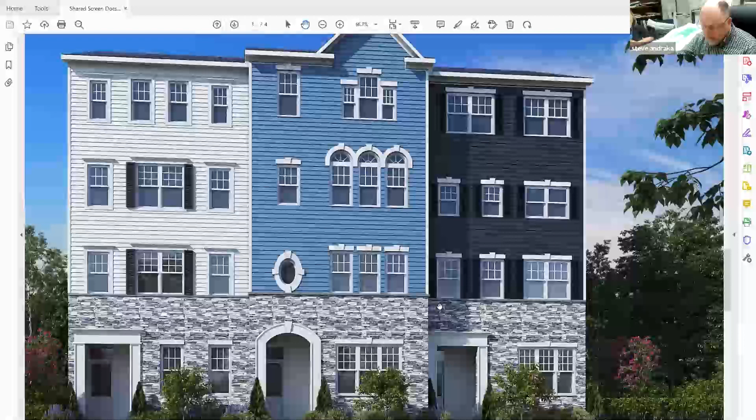Modifications, we are going to be going for a modification on the sidewalk section along Pine, because we're doing that to match what was done with the townhomes here. So we're doing a 6-foot walkway and then having a planting area, opposed to having a 10-foot walkway, because we're trying to match what was modified and done with the adjacent, so there's not a big change in the sidewalk and streetscape along Pine Street. And then off of it, we'd be providing shade trees in that landscape strip that we provide.

The other modification that we'd be seeking is to the parking requirements, or a reduction in parking requirements. 84 spaces are required. We'd be providing 69 spaces, with then another 11 parking spaces available as parallel parking on Baltimore Avenue.

That pretty much covers the checklist items. So I guess I'll open it up for questions.

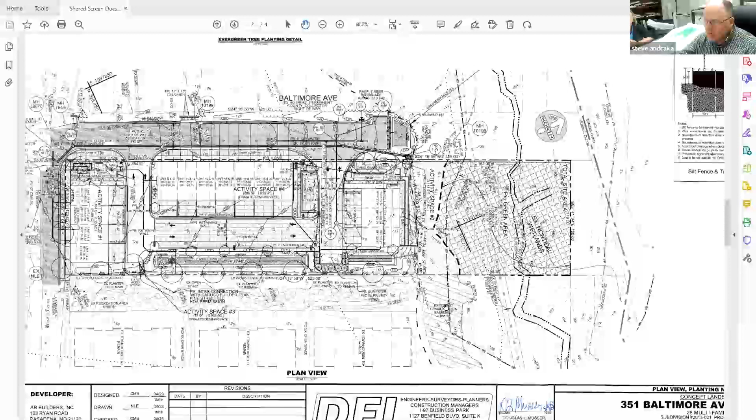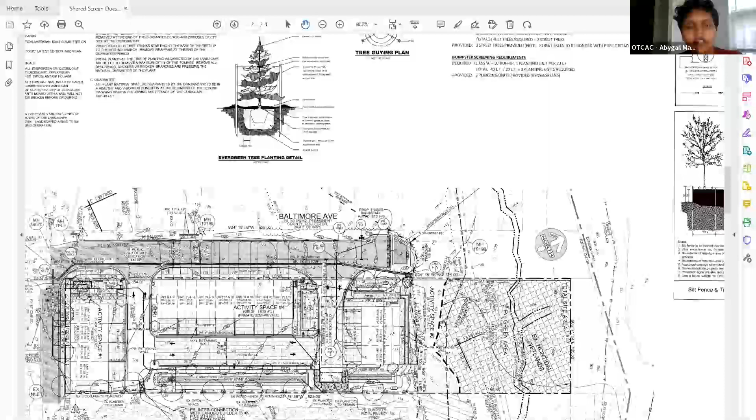Abigail asked about the first page, that area for the green space, pointing to the bottom area. It has an acronym for stormwater management, so she wanted to clarify this green space—is it just grass, or what exactly is it?

That is correct, it's not just grass. It'll be planted like this area here. That's going to be submerged gravel wetlands based on the soils that we found, but it would be planted within the submerged gravel wetlands. And in this area, this area, and this area would be micro-bioretention areas, planted with landscape or micro-bioretention plantings in each of those facilities.

Okay, great. I wanted to make sure that there was some type of stormwater or green infrastructure component to it. It sounds like you did that.

I know we talked about in the master plan a few months ago about how there will be an adjustment to the minimum parking requirements. I don't know if Jason or Mark might know more about whether there will be changes to the leniency on parking requirements. Jason responded: it's a recommendation in the master plan, but we haven't actually made any changes to the requirements of minimum or maximum parking. Abigail added: in general, what we've learned about American parking footprint habits, having less parking is usually never a bad thing—we usually have more than is ever used.

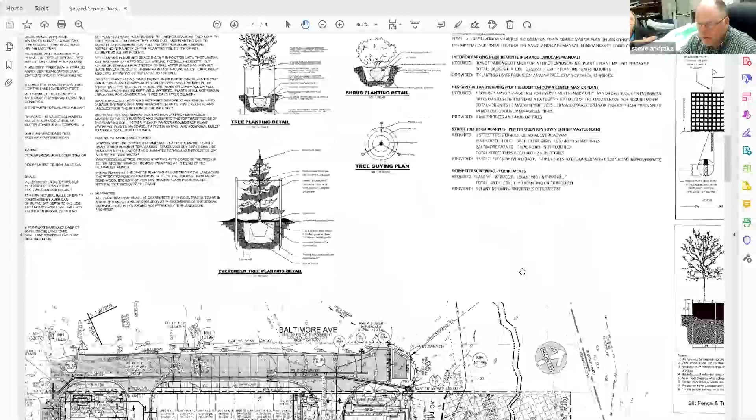Do committee members have more comments or questions?

I have one question. Do I see that connection to the other development? Yeah, and right now we're proposing an interconnection, but it would have to be with permission from the HOA with this other development. That's what we're suggesting, but there hasn't been anything finalized with this other development, but it was suggested that we have an interconnection.

Question, this is Martin. Was this originally proposed differently than what we're seeing now? Yes, it was originally proposed as regular townhome units like what you see on the adjacent subdivision. But from the feedback from the county, that wasn't the direction this town center area zone was supposed to be going. So they suggested, through a couple iterations with them, that we do something more like this.

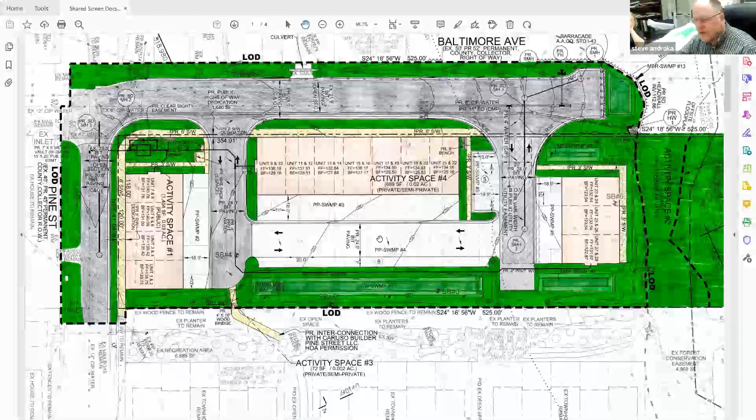I'm looking for the letter that was submitted to the applicant on behalf of our development division team. Yeah, that would be great, Mark.

I'd actually really like to see that, because I'm going to pull a Stuart here and say that I've driven through this area. I know this area, and I am displeased if that is what the county is saying, because this area is single family homes. The highest density in that area are the townhouses, and to go even higher density with condos is not right for the area. This part of Odenton is not condos. So I am disturbed to hear that.

Jason, can I interject for a second? Okay, let's be clear on the word condo being used here. The only reason it's a condominium is because there is common area that has to be taken care of, that is in common. It is not individual ownership. The houses themselves are considered townhouses. I just want to make sure we're clear on this. It's not that now there's townhouses and they wanted condominiums. The townhouses behind this project are condominiumized too, because they're broken up into different buildings. They all have the same common area to deal with. The reason it's done that way is divide and conquer, you want different condominium regimes, so you have 2 or 3. You have it in the village of town center, each building is a different condominium, even though those are apartments. So these are townhouses, and they're condominiumized just as a word, not a condominium building.

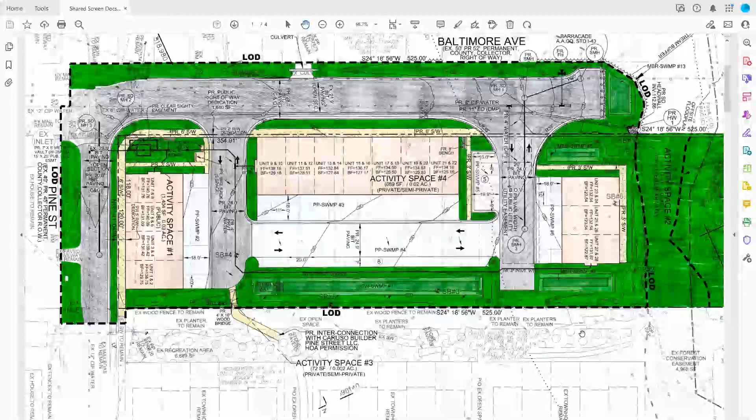I think it gives us now a mix of different products in that area, from single families all the way to condos across the street, apartments rather.

I agree with Stuart. The whole idea of fear of mixing houses is, to be fully transparent, rooted in white supremacy and NIMBYism. There is no real issue of what character even means when you have different densities mixed together. We want more walkable places, which means not having sprawl of only single family houses in one place and only multifamily in another separate place. There should be more commingling. The reality is that 70% of housing development is single family, and that's not the reality of US demographics for decades, yet we continue to build that. We need more multifamily housing, and these duplex-style houses aren't the fullest solution, but they're part of it, and mixing it is part of the solution. So I don't see a problem with having single family housing near other types of density housing.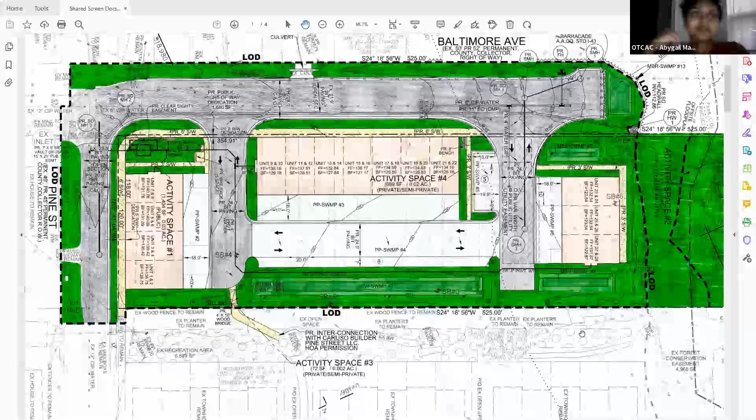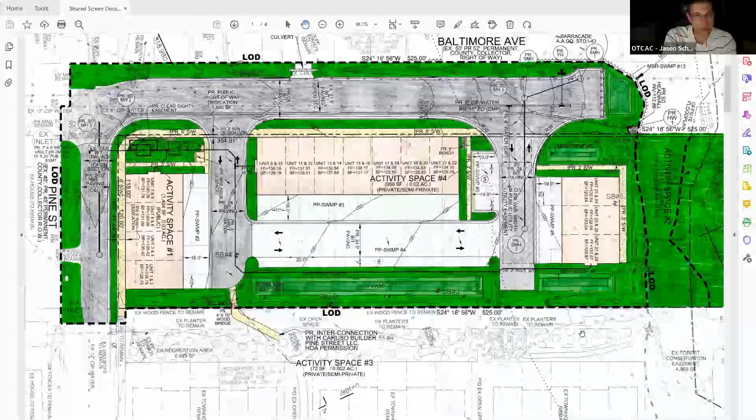So the issue I have with increasing the density, and this is where I have an issue with what you've done, looking at your previous proposal with the townhouses - there was a lot of green space, a lot of activity space spread around that was meaningful. That's gone in this proposal here. I think that's why you're getting more of an angry Jason on this one, because the activity spaces you've described are basically just benches.

That entire area to the right, I hear you, but that's wetlands, and I believe there's an elevation difference there. There's a difference between usable activity space and green space. You've taken away all the usable activity space, as well as the joined activity space that was originally planned with the existing townhome community, because the OTCAC did say we wanted you to work with that other HOA if possible to join activity spaces together. That's gone. So I think that's my biggest challenge with what you've done - you've subtracted out any place for people to do any type of outdoor activity, because the green space just isn't meaningful anymore as an activity space, it's just green space. I have to lay that out there, because that's what I see.

As well, Stuart, I lived in the town center commons 2x2s, and they're great units. I have no issues with this type of design because it's actually very smart. They're very spacious, so I think it's going to work very well for the Odenton area. I am a little concerned about parking though, because I don't share Abigail's optimism about less parking. My experience with town center commons is you get 2 parking spaces for people who have 3 or 4 cars, so there's a lot of bleed over. It's not less than 56 cars going into this place - you're probably going to have anywhere from 64 to 80. It's just a fact of life, unfortunately. But you have a number of spaces there.

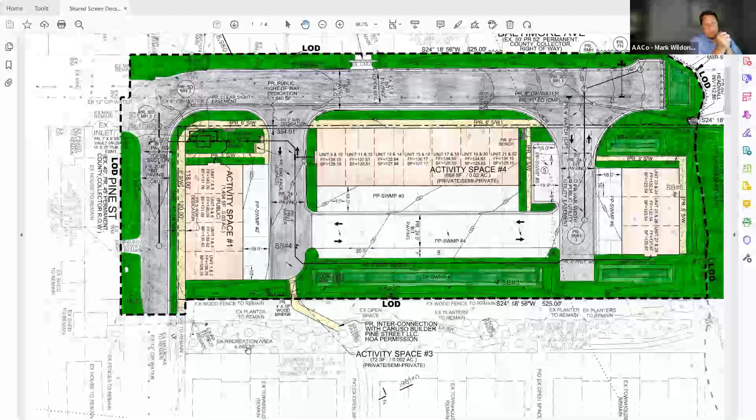But Jason, do we need more information on this background, or do we just use what we have now to make a decision or recommendation? So the question in front of the committee that we have to answer today - I'm going to need some help from Mark on this one. There's the redesign to go from the townhouses to the activity space, and the comment on that. But the previous approval from the committee included a modification request for the Pine Street sidewalk to match the adjacent property. What Steve said is they're requesting a modification for that same item. I don't know if the previous approval from the committee for that modification still stands, or if we have to reissue that approval. I'd recommend the committee take a position on the modification as it stands with this new design.

Okay, fair. And then the second modification is the provision of 69 parking spaces plus 11 for on-street parking, to pull it up to 80 instead of the required 84. That's the second modification I've recorded. Are there any other modifications, Steve? No, just those two, and then basically the thought on the redesign fitting the master plan guidelines.

In terms of what Mark read about the driveways not facing the road and not being pedestrian conducive - from the letter of the master plan, they are correct. From how that community is currently laid out, I think that's a bit of a stretch, but that's Jason's personal opinion. But from the spirit of the master plan, they're correct. So I think there is enough for the committee to provide an answer if the committee does feel like it.

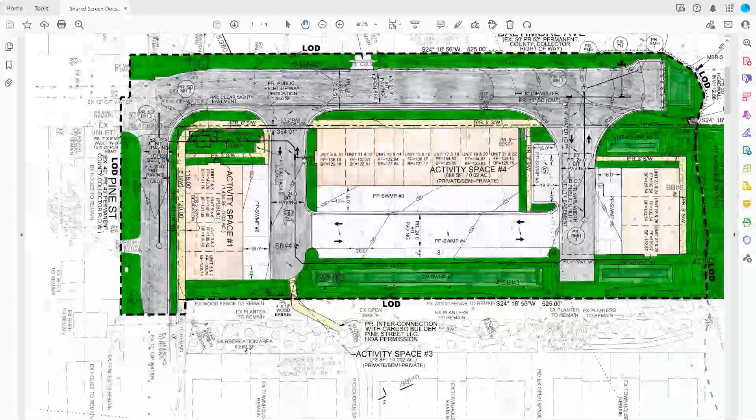So, are there other comments or questions from the committee? Jason, just real quickly, if I could ask Steve a question - Steve, this is Martin. Did you talk about the vegetation much? You did mention the retention areas, but what about other plantings around - native plants and so on? Can you provide a bit more information on what you're providing there?

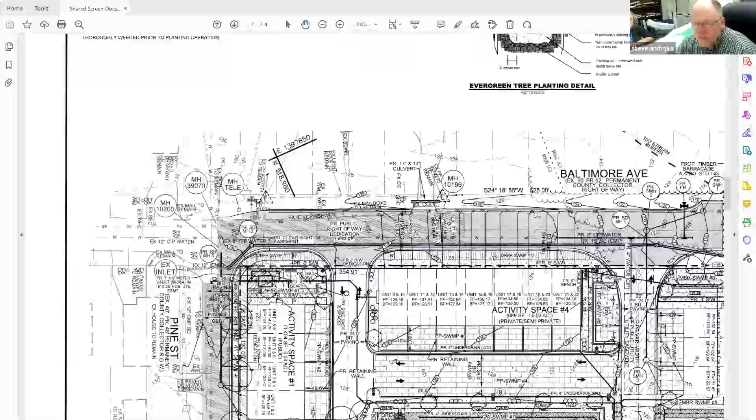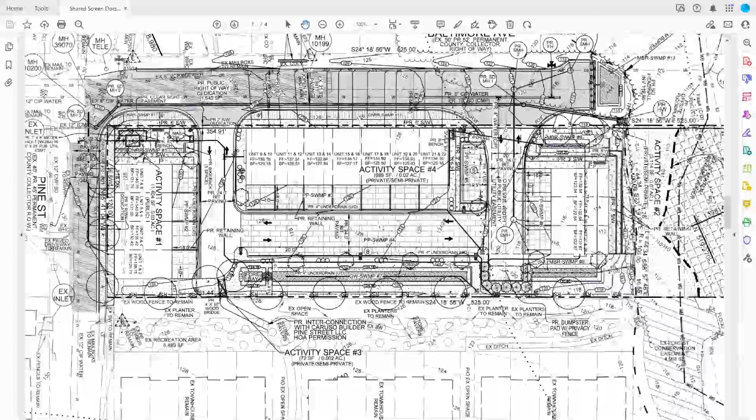Yeah, so along Pine Street in that landscape strip, we have shade trees, and also shade trees in the green area between the gravel wetlands and the adjacent subdivision. Then internally, we'd have trees and shrubs. And then in each of these stormwater management areas, those would each be landscaped or have their own stormwater management plantings.

You know, the micro-bioretention and the gravel wetlands both utilize plantings as part of their treatment.

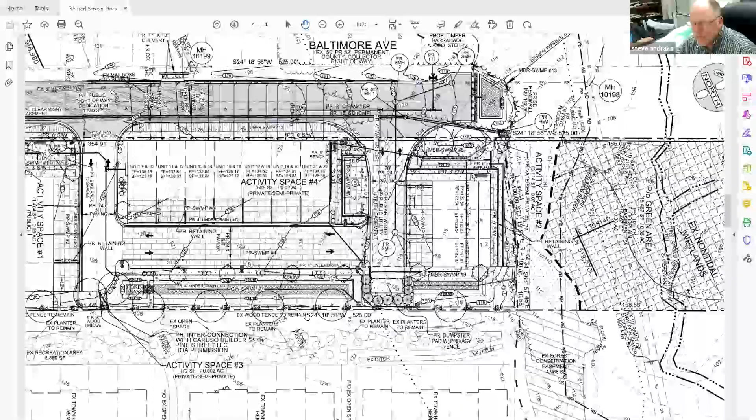Thanks, Steve. On the shade trees, that's great, you get more hardscape there. Are the trees good for wildlife? Do you know what they are, lindens, maples, oaks? We're at the sketch stage, we haven't gotten to that degree of selecting species of trees yet.

But in terms of wildlife, there's a large contiguous green area that will be preserved, adjacent to the stream all the way up to the back of the units. Realistically, you might have squirrels going to the trees, but I wouldn't expect a whole lot of wildlife in plantings adjacent to the parking lot.

I guess I'm not thinking squirrels, I'm thinking more birds, bird value for the trees you plant. Sometimes the trees that are planted have no value to the bird life, so if it does encourage birds to come there, that might add more interest to the community. Okay, that makes sense.

We can certainly pick shade tree species that would be attractive to birds. Now I'm not going to put any dead trees for the woodpeckers, but not yet anyway, not right away.

That's it for me, Jason. All right, any other comments from the committee or questions?

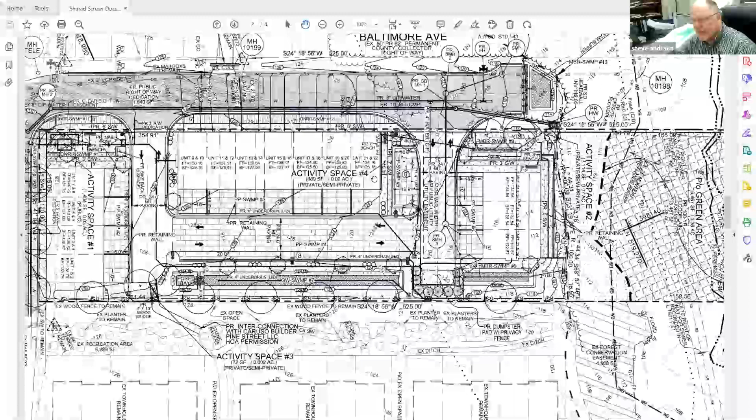I don't think they've looked into it that far. When I had discussion with the builder, the response was that they'll each have their own garage unit, so they could have an EV charger in there if that's something they choose to have. Yeah, I think an owner has to do that on their own, the developer doesn't install that.

I'd like to make a motion to vote on this. Hold on, sir, we have to make sure we end public comment. So, Jerry, hope that answered your question. Thank you for your comments. Any other public comments?

Okay, back to the committee, and I do want to correct one thing for the record. In terms of solar, HOAs cannot deny that, that is true. However, in this context with these shared buildings, an individual unit owner will not own the roof. So for everybody attending, an individual unit owner here won't actually have the authority to have solar installed. That is a community decision of whether it's allowed or not, because as Steve stated, the exterior of the building is a shared resource. So for this complex, individual unit owners won't have that authority, assuming this is similar to all the other 2-over-2s that exist in Odenton.

Okay, so back to the committee. Any other final comments on this proposal?

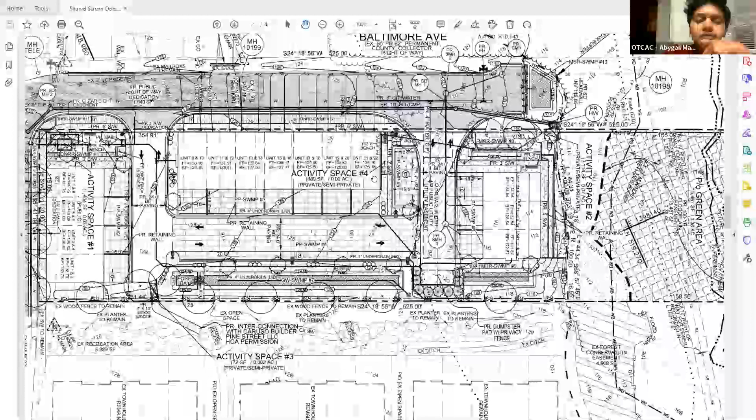Can we clarify what's happening with the parking before that? Oh, great point. So the committee would also recommend approval of modifications to the Pine Street sidewalk to match the adjacent property, and the committee would recommend approval for permitting the reduction in allowed required parking to be 69 plus 11.

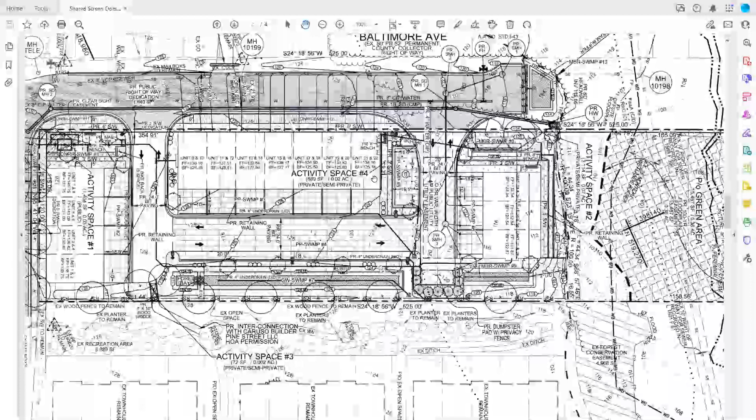Okay, so I could put in the letter that the committee is recommending approval based upon the information received that the county recommended the developer redesign from the townhouses because there was not sufficient high density to meet master plan requirements, and that our recommendation of approval is predicated upon that, if that would suffice. As long as the county's okay, sure. That's a good way of doing it, Jason. Okay.

All right, so just for clarity, before we ask for a second, the motion is to recommend approval of the redesign, with the caveat that the committee is recommending approval based upon information that the county provided, that the original developer proposal for townhouses was not sufficient to meet density requirements of the master plan. The committee also recommends approval of the Pine Street modification and the required parking, and accounting for the activity space and landscaping discussion we had. So that's what's currently on the table.

Pretty efficient. Okay, is there a second for that? I'll second that. Okay, Martin, thank you. Any other discussion on the contents of the letter? Okay, so all in favor of that motion for approval with those comments, raise your hand or say aye. Aye.

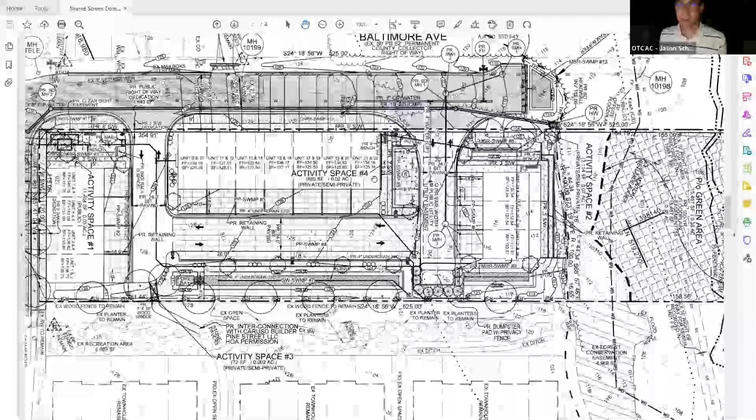In the opinion of the chair, the ayes have it. So this redesign is recommended to be approved, with the modifications recommended to be approved with the provided comments.

Steve, thank you for your time. Thanks for presenting to us. We appreciate you coming here.